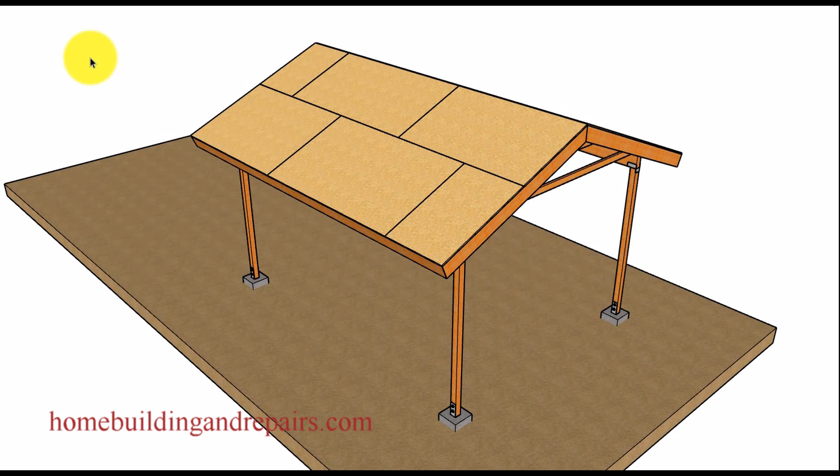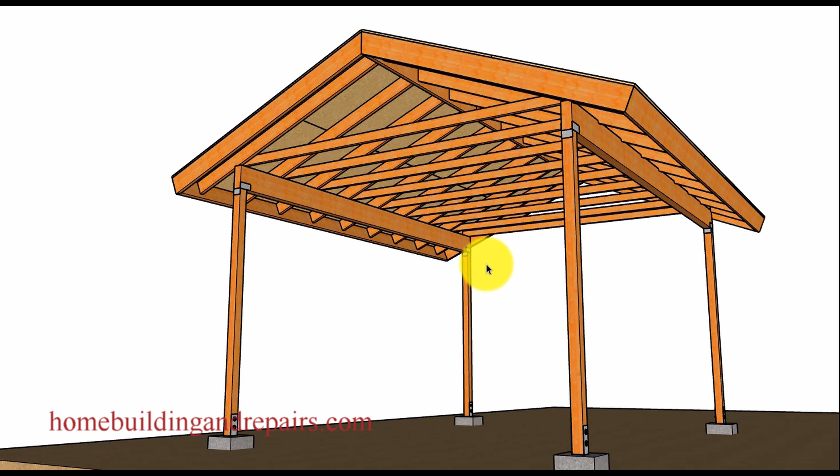In this video, I am going to try and provide you with a few ideas that you can use to make a 4-post structure, something like this, a little stronger, and to prevent the roof from collapsing and falling onto the ground.

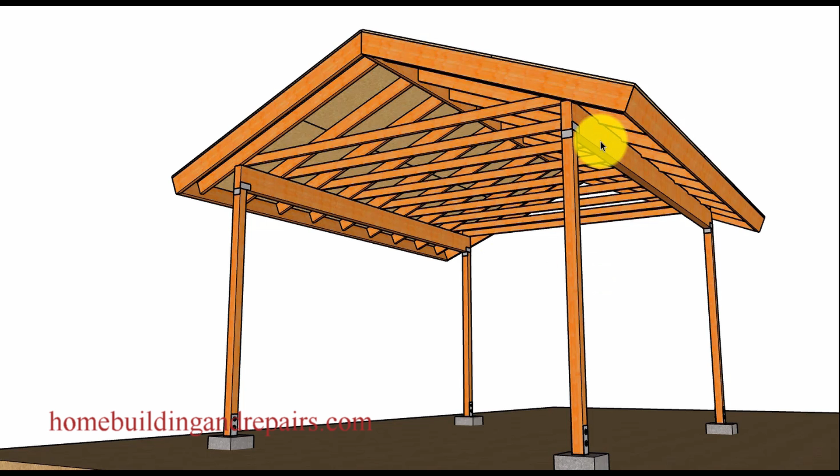I cannot tell you how many times I've come across a building where the roof is intact, perfectly fine, there's nothing wrong with it, sitting on the ground, and people are like, "How? What the heck happened? Why would you build a roof and put it on the ground? That just doesn't make any sense." But if you had a picture of the area previously and you saw something like this, well, it might make a little more sense.

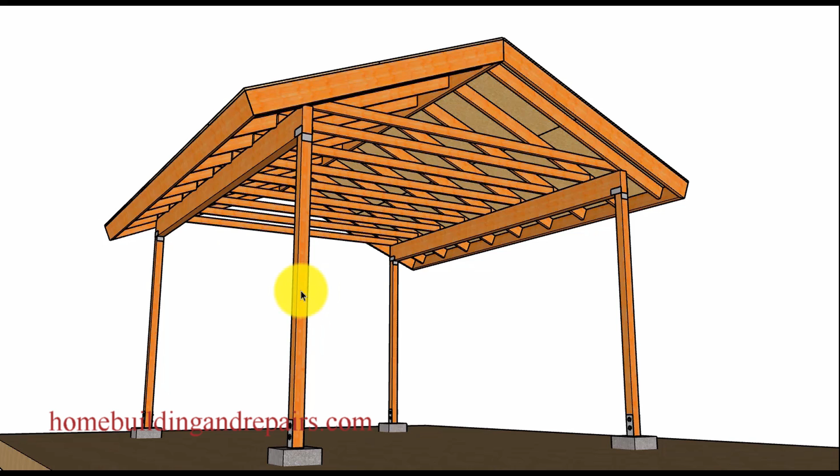Now, these buildings are not that strong. If I see a building like this, I walk up to it every once in a while and just see if I can move it. It doesn't take much to move a building like this, and I would imagine it wouldn't take much to push one over. You hit it with your car or something like that, and this thing's on the ground, and you're like, how did that happen?

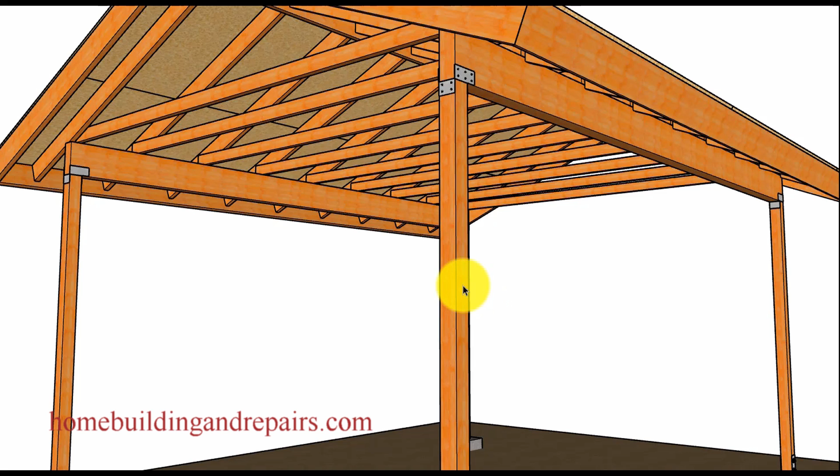So the reason for that is because there's no shear walls. There's no walls with siding or stucco on them. Let's just pan back here a little bit. If this had a wall or shear panel on it, plywood siding, and maybe a concrete foundation, then you're not going to be able to push this section from right to left, but you'd be able to push it forward and backwards.

It would move. So for this, I would recommend putting at least 2 walls, one on this side and then one on this side, to get a little more strength in a building like this. And of course, this is why with a garage, you can have 3 walls and an opening. And if you just have an opening with no other walls in here that are maybe 12 inches or so for a garage door, you can actually push these. I've done that before. This will move from right to left in the picture.

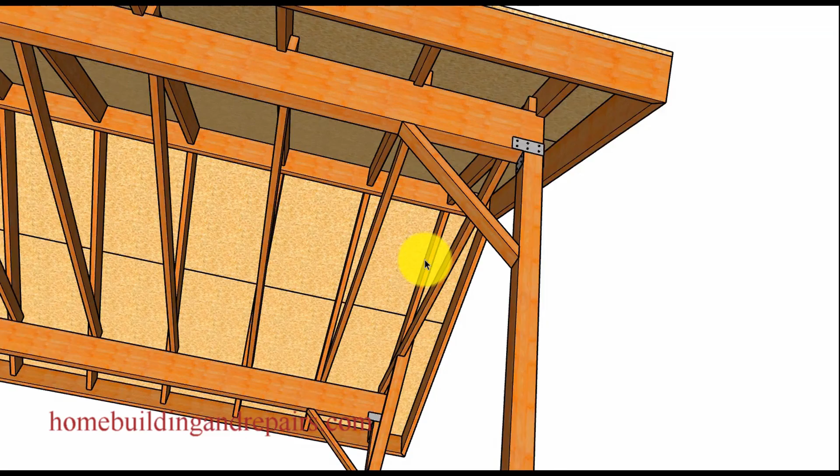So there, you can always install braces. These are going to help. I wish I could provide you with a length on the braces to create a building that's not going to fall over. But these braces in reality don't seem to help that much. Again, I've come up to buildings like this with braces on them, and they move. They just don't move as much.

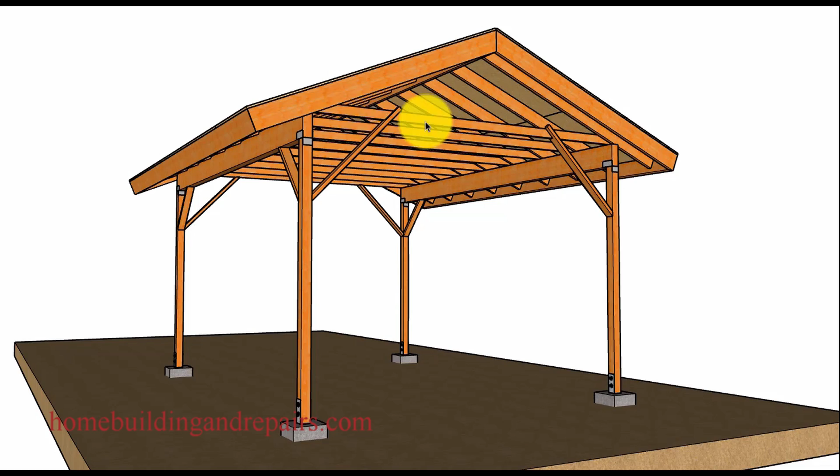So braces usually go underneath the beams like this, and usually they have 4 beams that are the same height in a building like this. I didn't draw it that way, but if it was drawn that way, then the braces would simply go underneath the beams instead of somehow tying into the rafter ties like we're showing here.

Now, another thing I want to point out, if you have a building like this, to maintain it, just make sure that these bolts are tight. You wouldn't believe the strength that you get out of something like this just by having these bolts tight instead of loose. And I say that, but that's kind of a common sense approach thing.

You would believe that. I actually worked on an apartment complex one time, and the carports were all built like this. And I was taking all the temporary bracing off of them after the roofs were nailed, and the building started to lean over.

And the contractor came out and said, what the heck are you doing? I got chewed out for that, something I won't ever forget. And all I did was we went and pushed the buildings back into their spot and tightened up these bolts. And I just couldn't believe that. I could see this job from the freeway, and I drove by it every once in a while, and I was just waiting to see these things on the ground. I just couldn't believe that it had stood up.

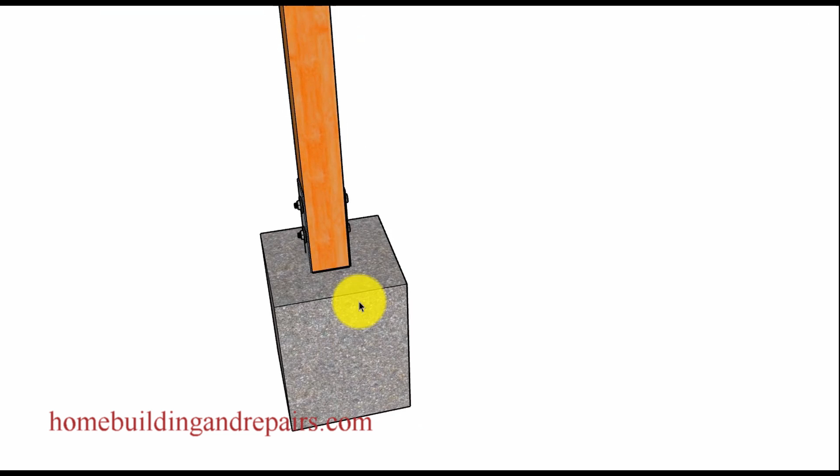So I'm not suggesting a building like this is going to fall down, but I think you can do a few things to the footings to make them a little stronger. And one of those things would be to make sure that the concrete footing is large enough. And I really can't provide you with a size on that, because people are always asking me for structural dimensions, and I can't.

This particular building, I think, is 10 foot by 14 foot, and 8 foot tall, something like that. You put a 12 by 12 concrete footing in here, and if it's sandy soil, clay soil, something where it's loose, it's going to need a different size footing. So this one here is 12 inches by 18 inches by 12 inches, but you might need to adjust the size of your footing. And if you don't know, and you're not going to hire an engineer, just make it larger. Larger is going to be better, or should I say at least most of the time.

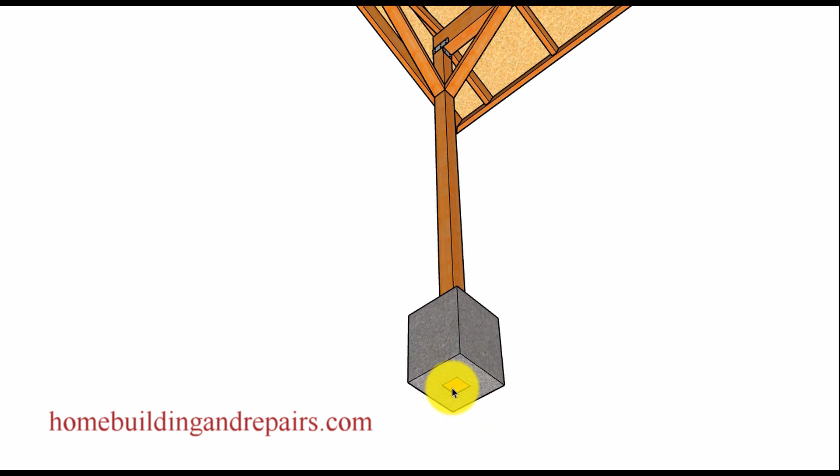Now, another thing you can do would be to put a post into the concrete footing. I've seen this done plenty of times, and this really creates a strong structure. Just make sure that the post is ground rated, something that isn't going to rot over time. Another idea would be to install some type of a brace. Here we have a 2-inch diameter pipe, and again, this would not be something that you would be using for a chain link fence. This would have to be heavy duty. You could bolt it to the post, and then of course make sure that it is embedded into the concrete.

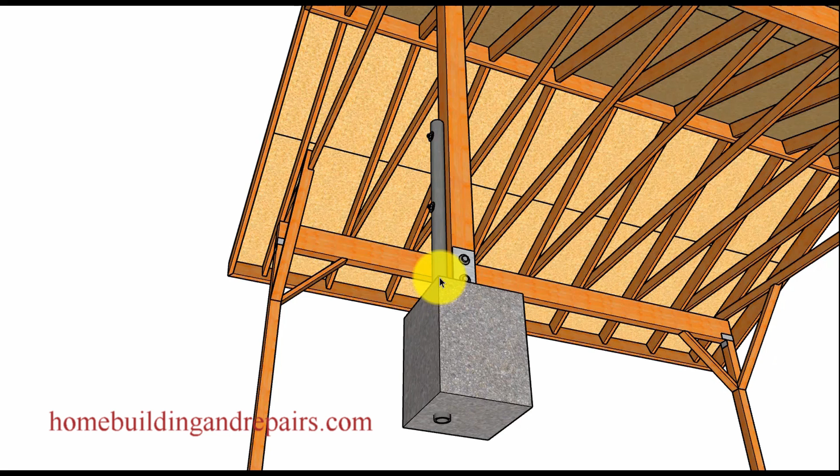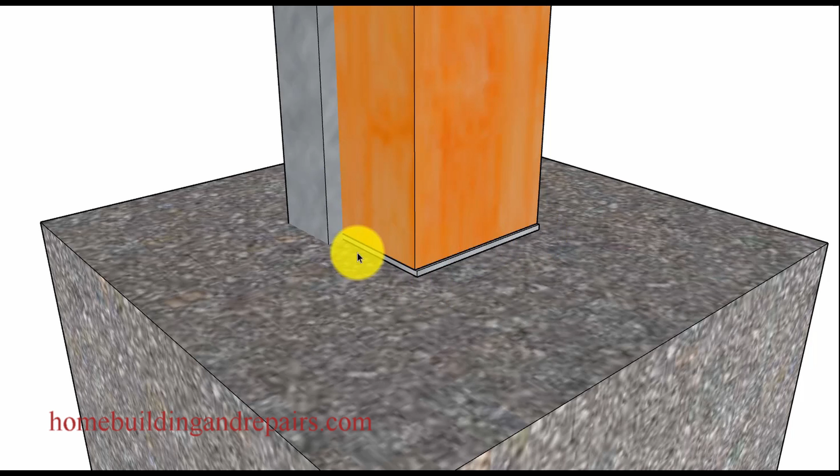And the length on this, again, I really can't help you. You want it to be stronger, go up a little higher, make the footing a little deeper, right? All that stuff should make sense. Another idea would be to use some type of channel metal like this. Just make sure that it is heavy duty and strong enough to do its job. Something like this might also be a great idea, something that would wrap around the post. And of course, this is something you might have to pick up from somebody who manufactures products like these. It'd be nice to have some type of metal plate on the bottom to prevent the wood from being in direct contact with the concrete.

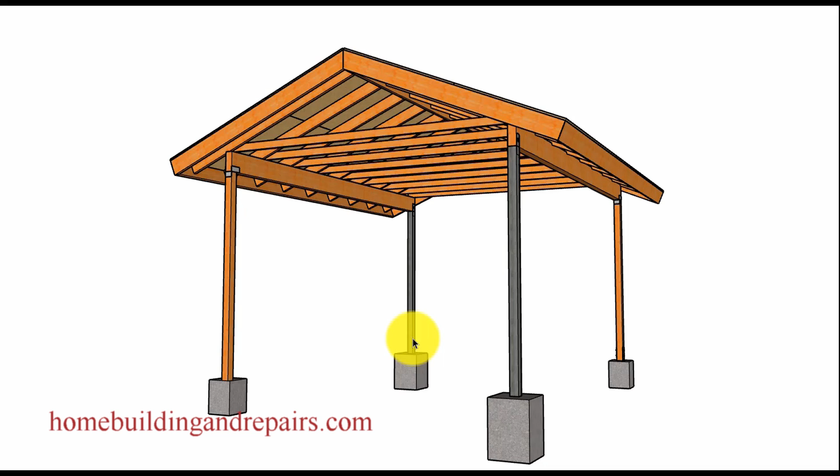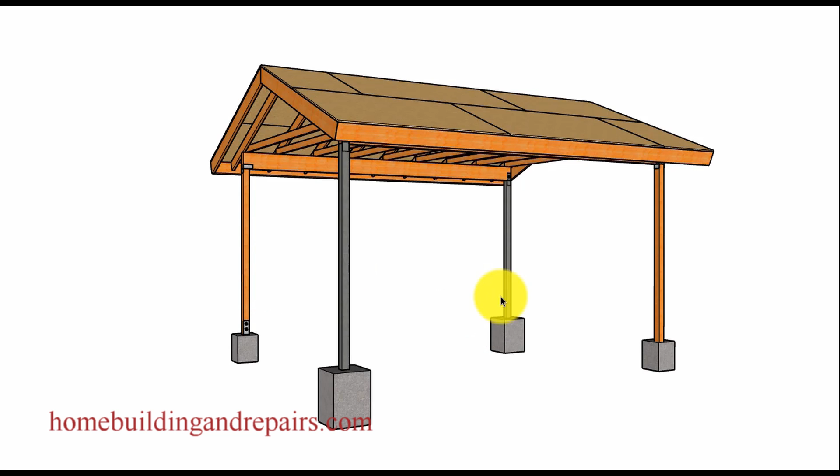And for those of you who are looking for something even stronger, how about a metal post embedded in the concrete with some type of a connecting flange at the top? This should provide you with something nice and strong. And of course, 2 might be enough. Sometimes money is an issue, sometimes it isn't. 4 is going to be better than 2. But I just wanted to throw this in there because sometimes people are watching these videos and they're looking for a variety of different ideas, and this is just another one of them. So 4 metal posts in a nice thick and large concrete footing should create a nice solid structure, and you won't have to worry about it falling down on the ground, hopefully.